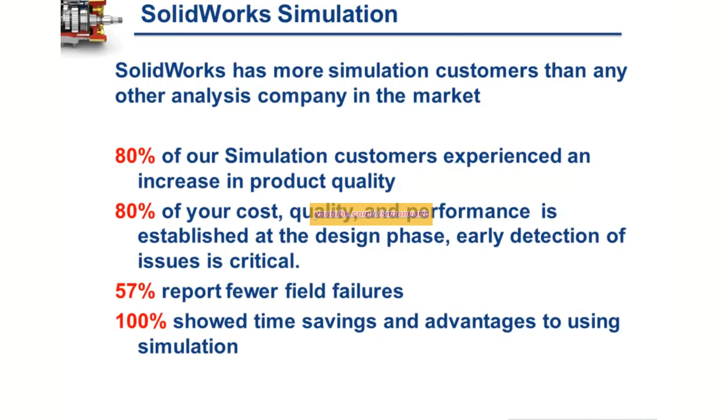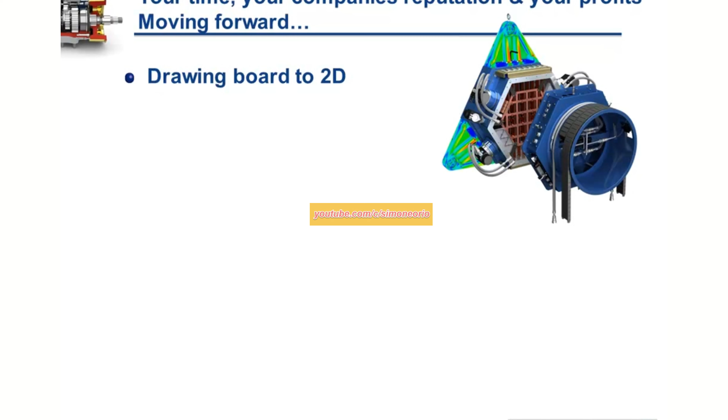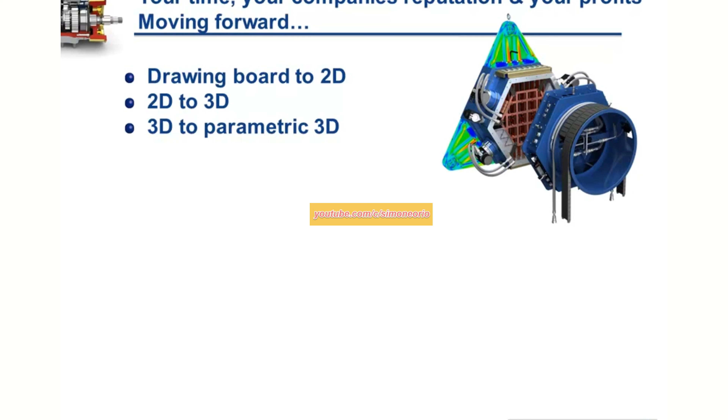Initially, customers were kind of ahead of the curve. They could differentiate themselves by moving from the drawing boards to 2D drawings, and then the change from 2D to 3D was considered leading edge. Eventually, the advantages of developing 3D parametric modeling were seen, so that you can design similar but different products without starting from scratch. Then there was moving into the PC-based solid modeling environment, and then virtual testing with SolidWorks simulation. Each step is going to keep you ahead of your competition to lower your costs and improve your sales.

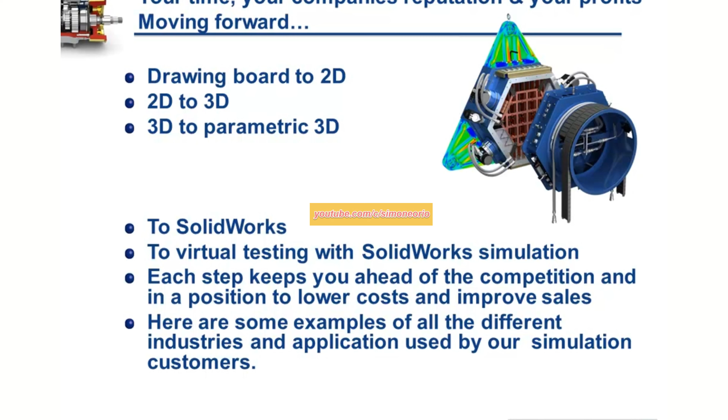So let's look at a few different industries and how SolidWorks simulation, specifically Simulation Professional, could benefit them.

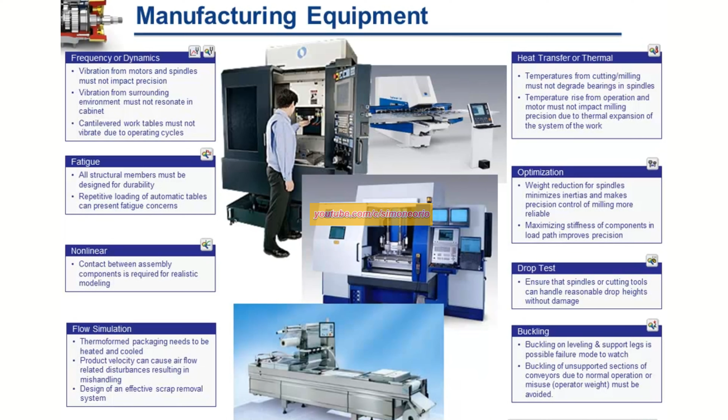For example, manufacturing equipment. Let's look at fatigue in this case. Manufacturing, repeated cycles, repeated loading - this is where fatigue analysis can come in and be very beneficial. Structural members in a manufacturing environment must be designed for durability, and repetitive loading can present fatigue issues. But many times you need to ship equipment, and you don't want to just consistently and constantly overbuild. In addition, material cost, material weight equals material cost.

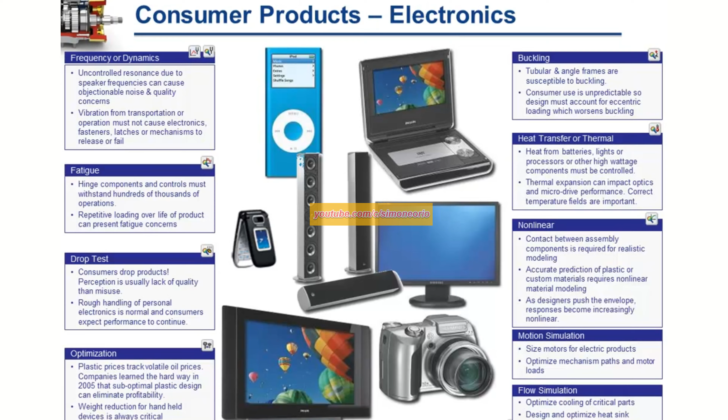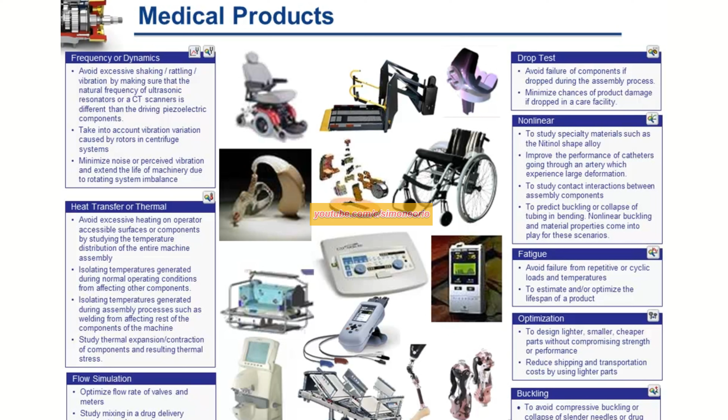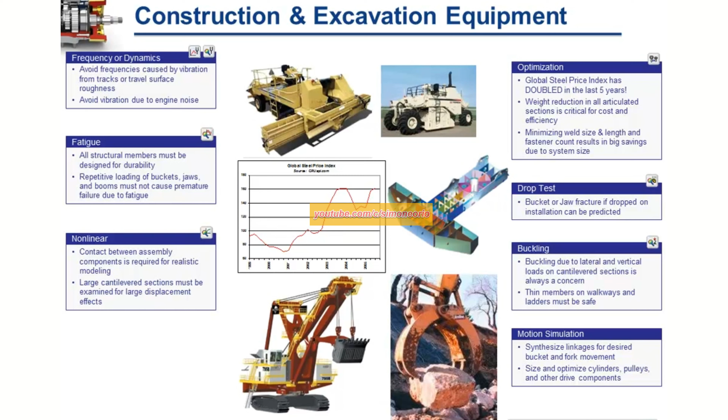Lastly, let's think about simulation in terms of construction and excavation equipment. When I think of equipment like this, I think immediately of motion simulation, kinematics and dynamics, sizing cylinders, determining loads and members so that we can then perform structural analysis. When we have more complex motion events, we can benefit from using Simulation Professional's event-based motion so that we can use analysis sensors to trigger other operations so that we can synthesize our linkages and optimize our designs for power and for function.

So simulation is not only going to save you money with your products and increase your quality, but it also allows you to differentiate yourself. By shortening design cycles, you can get to market faster where there's the blue ocean, where there's no other competitors, and you can essentially differentiate yourself from the competition by learning more about your designs early on.

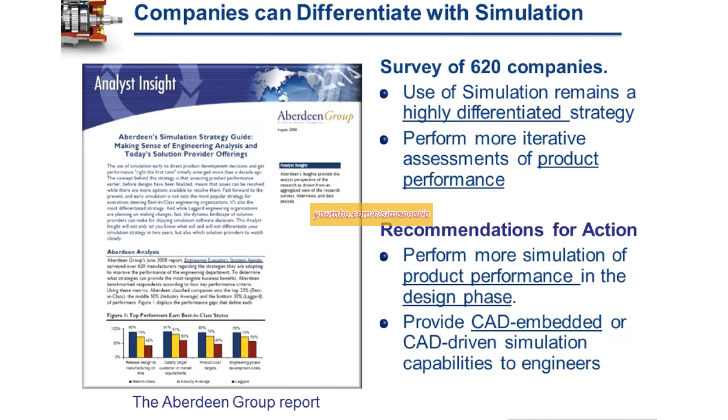An example of a customer that's differentiated themselves by going from 2D to 3D and to 3D with simulation is AP Racing. AP Racing designed parts for Formula One cars, and they needed a method to validate their design so that they can make quick design changes. An interesting note is that over the years engine power outputs have nearly doubled, but the size and weight of their products have decreased dramatically, and they've been able to accomplish this by using three-dimensional modeling in conjunction with simulation so that they can validate every design before they are caught in a physical test loop.

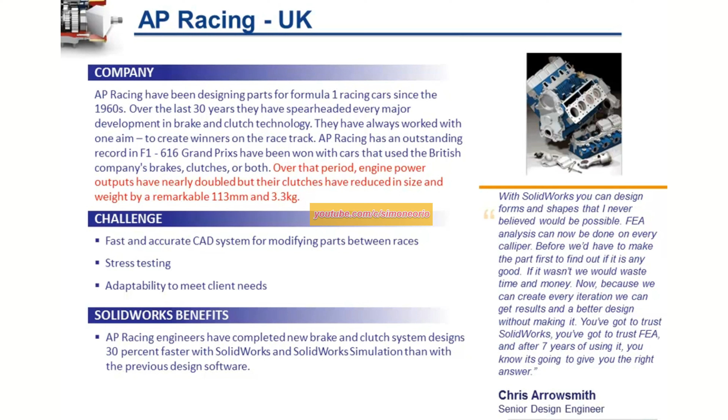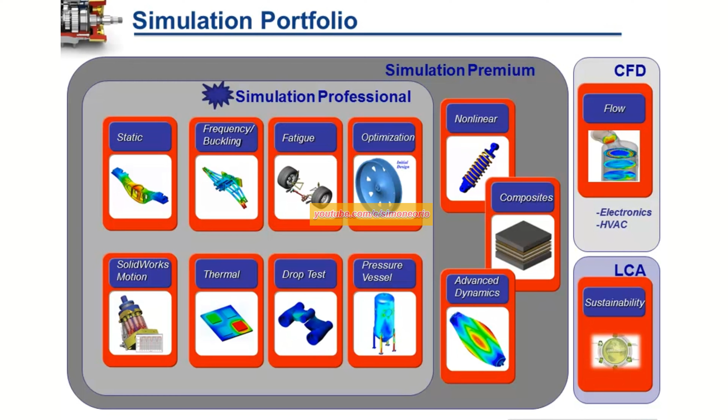Specifically today we're going to discuss Simulation Professional, which brings optimization to the table, fatigue, frequency and buckling, thermal analysis, drop test, and pressure vessel. In addition, it includes static analysis of assemblies and motion analysis.

Within the motion analysis and static analysis realm, Simulation Professional also adds a few features that are only available within the realm of SimPro, including 2D simplification, edge weld connectors, fatigue check plots, trend tracker, event-based motion, the ability to save out our deformed body, in addition the ability to export the analysis deck both to GeoStar and to other analysis tools if you have to interface with other analysis packages and you want to use the ease of meshing and model setup within the SOLIDWORKS environment.